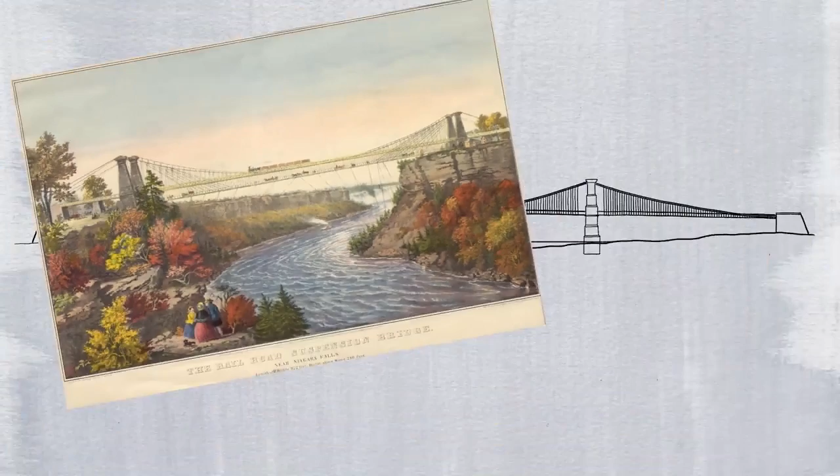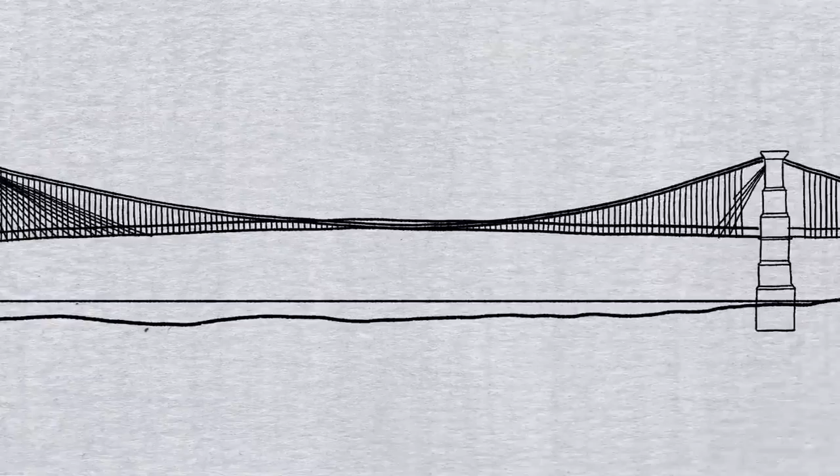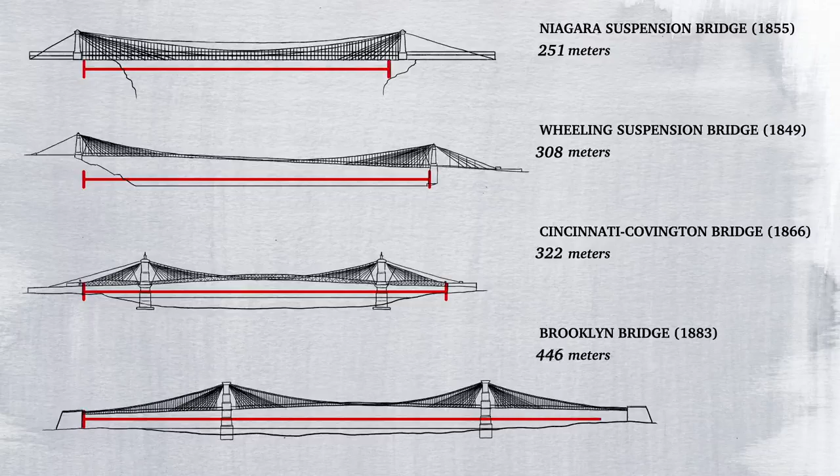But Roebling's model also drew from cable-stayed bridges. These shorter structures held up their decks with diagonal cables that ran directly to support towers. By adding these additional cables, Roebling improved the bridge's stability, while also reducing the weight on its anchor cables. Similar designs had been used for some other bridges, but the scope of Roebling's plan here dwarfed them all. His new bridge's deck spanned over 440 meters, 1.5 times longer than any previously built suspension bridge.

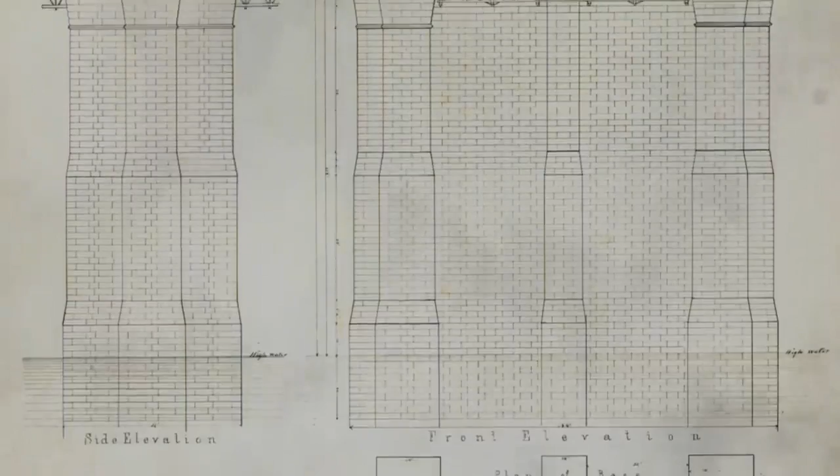Since standard hemp rope would tear under the deck's 14,680 tons, his proposal called for over 5,600 kilometers of metal wire to create the bridge's cables. To support all this weight, the towers would need to stand over 80 meters above sea level, making them the tallest structures in the Western Hemisphere. Roebling was confident his design would work, but while surveying the site in 1869, an incoming boat crushed his foot against the dock. Within a month, tetanus had claimed his life.

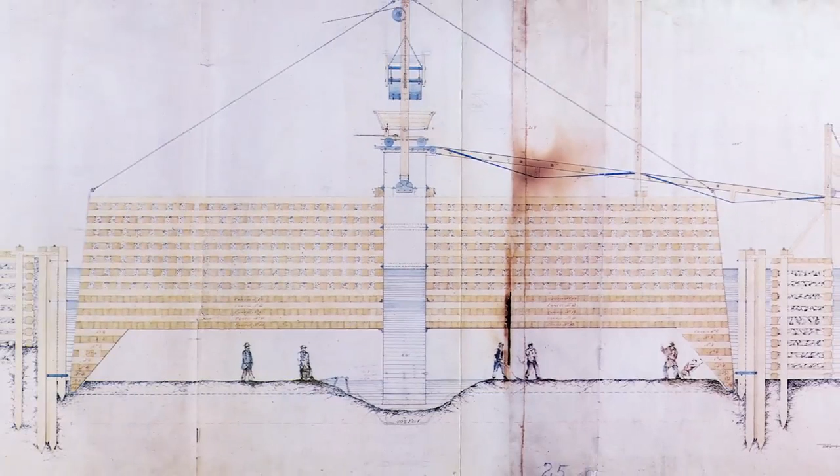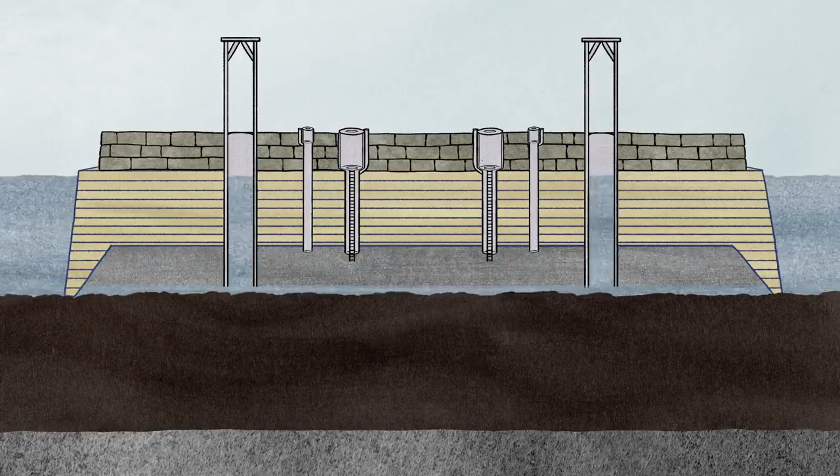Fortunately, John Roebling's son Washington was also a trained engineer and took over his father's role. The following year, construction on the tower foundations finally began. This first step in construction was also the most challenging. Building on the rocky riverbed involved the use of a largely untested technology, pneumatic caissons. Workers lowered these airtight wooden boxes into the river, where a system of pipes pumped pressurized air in and water out. Once established, airlocks allowed workers to enter the chamber and excavate the river bottom.

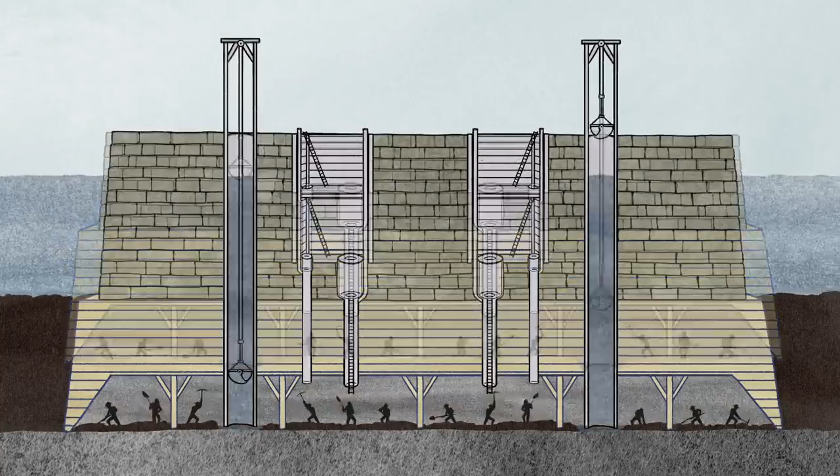They placed layers of stone on top of the caisson as they dug. When it finally hit the bedrock, they filled it with concrete, becoming the tower's permanent foundation. Working conditions in these caissons were dismal and dangerous. Lit only by candles and gas lamps, the chambers caught fire several times, forcing them to be evacuated and flooded. Even more dangerous was a mysterious ailment called the bends.

Today, we understand this as decompression sickness, but at the time, it appeared to be an unexplainable pain or dizziness that killed several workmen. In 1872, it nearly claimed the life of the chief engineer. Washington survived, but was left paralyzed and bedridden. Yet once again, the Roeblings proved indomitable. Washington's wife, Emily, not only carried communications between her husband and the engineers, but soon took over day-to-day project management.

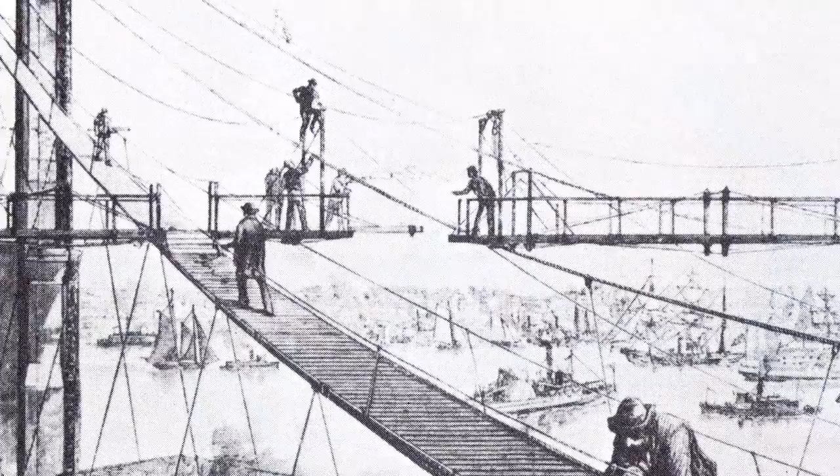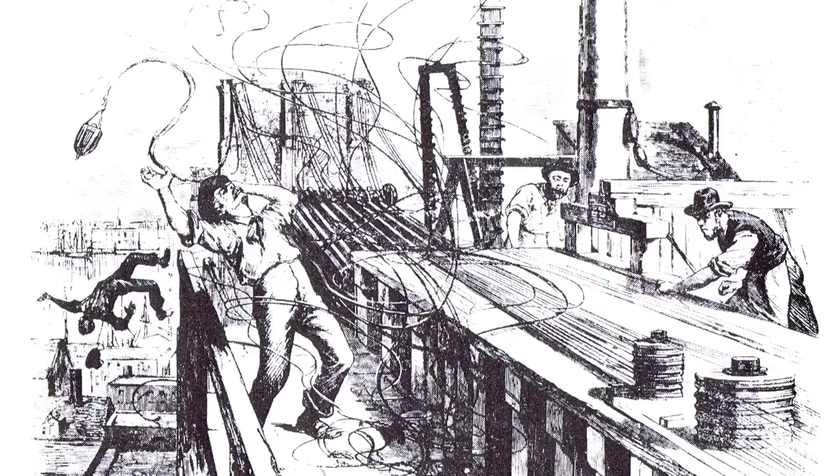Unfortunately, the bridge's troubles were far from over. By 1877, construction was over budget and behind schedule. Worse still, it turned out the bridge's cable contractor had been selling them faulty wires. This would have been a fatal flaw if not for the abundant fail-safes in John Roebling's design. After reinforcing the cables with additional wires, they suspended the deck piece by piece. It took 14 years, the modern equivalent of over $400 million, and the life's work of 3 different Roeblings.

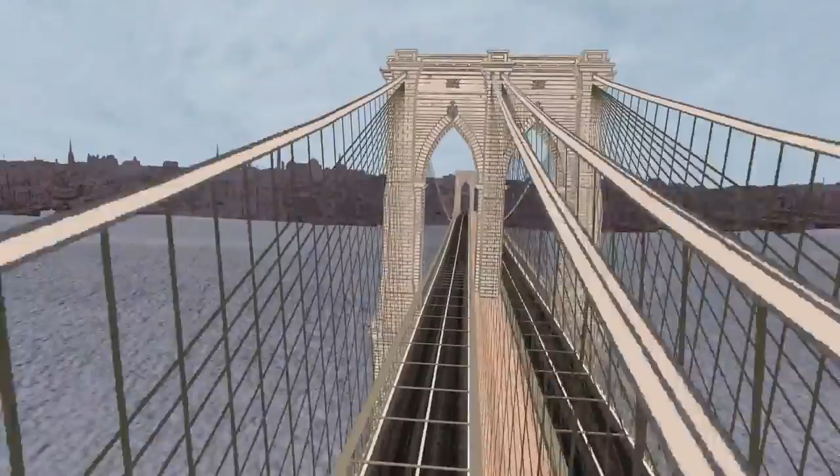But when the Brooklyn Bridge finally opened on May 24, 1883, its splendor was undeniable. Today, the Brooklyn Bridge still stands atop its antique caissons, supporting the Gothic towers and intersecting cables that frame a gateway to New York City.